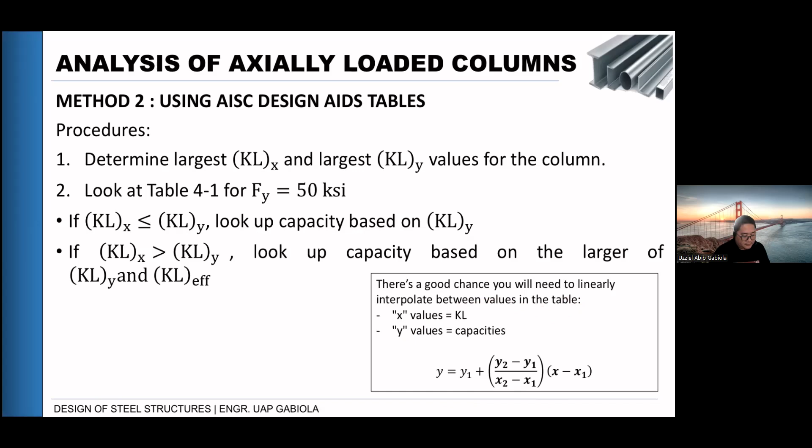So for weak and strong axis, again, ito yung KL effective natin. So that is just a division. Yung KLX value natin, we just divide it by the RX over RY value of our section. So yung RX over RY, we can also look that in our table 4-1. Okay? Or if not, you just need to get the value of Rx and Ry of the given section on table 1-1. Then just divide it to get the KL effective.

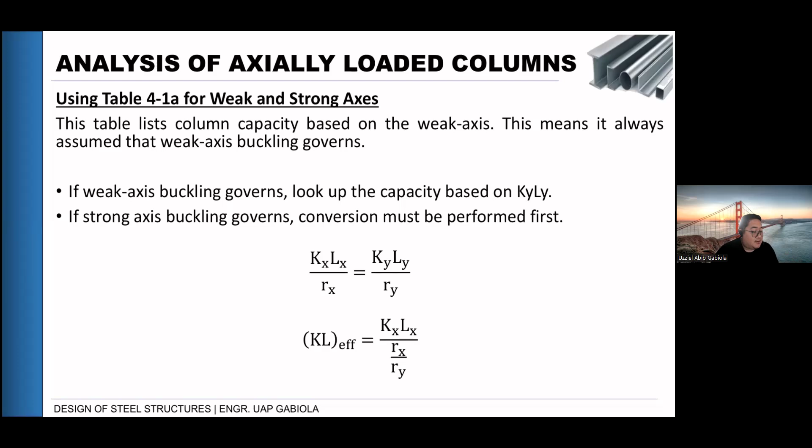So now let's proceed with the design or yung procedures natin for design. So again, for design, ang aim natin is to look for the most appropriate or economical section na gagamitin natin. And ang first step natin, of course, is determine yung load na kailangan natin i-carry. So yung factored load natin, or yung allowable load natin for ASD. After that, determine daw natin yung KL value natin for both direction, for X and Y direction or major and minor axis. So, yung KL natin will depend on the length and the type of boundary condition or support condition ng column natin. Kaya calculate natin yung KLX and KLY.

Okay, select the lightest W-shaped column. So this is a dead load of 100 kips and a live load of 200 kips given the bracing configuration as shown. So let Fy equal 50 ksi. So as you can see, we have the strong axis and weak axis. For the strong axis, we have a support of a fixed condition. So dito fixed. And then for the weak axis, we have two segments. First segment is a pin, and then the second segment is a pin fix. So let's determine yung K value muna nila before we proceed.

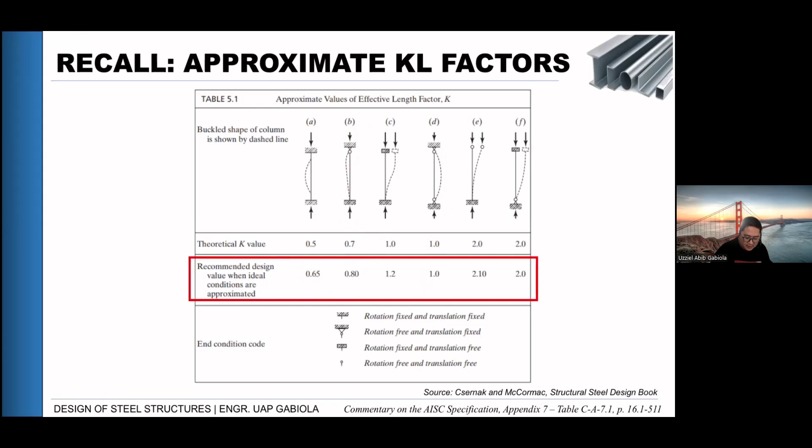This K is equal to 1.0. And then K is equal to 0.8. Okay? And then, let's follow the steps prescribed dito. Number one is to determine yung factored load natin. So, assuming LRFD na lang muna tayo. So, Pu is equal to 1.2 PD plus 1.6 PL. That is 1.2 times 100 kips plus 1.6 times 200. That is 440 kips.

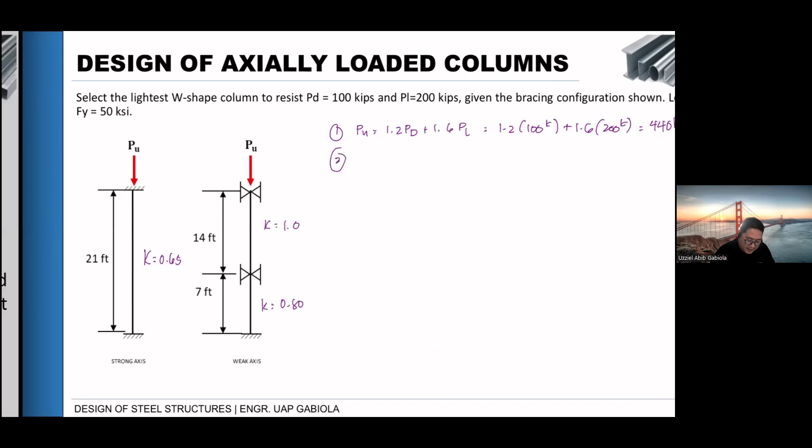Okay, next. Determine the largest KLx sa major axis and the largest sa KLy. So for KLx, isa lang naman yan. That is 0.65 times 21 feet. Now for KLy, ano yung larger natin? Ito yung 1.0, tapos 14 yung length niya. Ito yung 0.8, tapos ito ay 7 feet. So definitely, the larger one is the upper segment.

So this is 1.0 and 14 feet. So this is 13.65 and then this is 14. Okay? So yan, that is the second step.

And then for our third step, based on KLy, select a group of trial sections. So ang KLy natin is 14. Ang pag-select, kailangan ang Pu natin is 440, and yung KLy natin should be 14 feet. So, lagay natin dito, isa sa W14, isa sa W12, isa sa W10, and then isa sa W8. Ito yung kailangan natin i-satisfy: yung 440 tsaka yung 14 na KL natin. So, let's open yung Table 4-1.

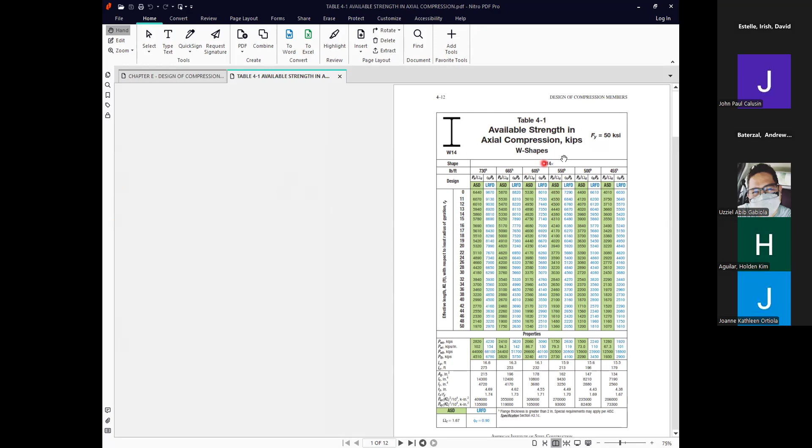Okay? So, what can you see now? Ayan. Yung PDF na ang kita, no? So this is Table 4-1. So starting with W14. Punta tayo dun sa section na may 14 na KL tapos ang capacity na kailangan natin ay at least 440. So si W14, ang starting niya is itong page na to. Titingnan natin yung KL 14, and then yung 440.

Itong kulay blue yung ating LRFD. So sa 14, we have 318, 360, 401. So ang first section is yung 571. Ito yung pinaka maliit na greater than 440. So that is W14 by 61.

Sulat ko lang, W14 by 61. Tapos sulat ko yung capacity niya. That is 571 kips. And then, sulat ko din yung kanyang rx over ry na value dito sa ilalim. Rx over ry niya is 2.44. Okay? That is for W14.

Ngayon for W12. Punta tayo sa smallest ng W12, again sa 14 na KL. So, 384, 502. Ito na yung smallest. So that is W12 by 53, na may capacity na 502. Then rx over ry, that is 2.11.

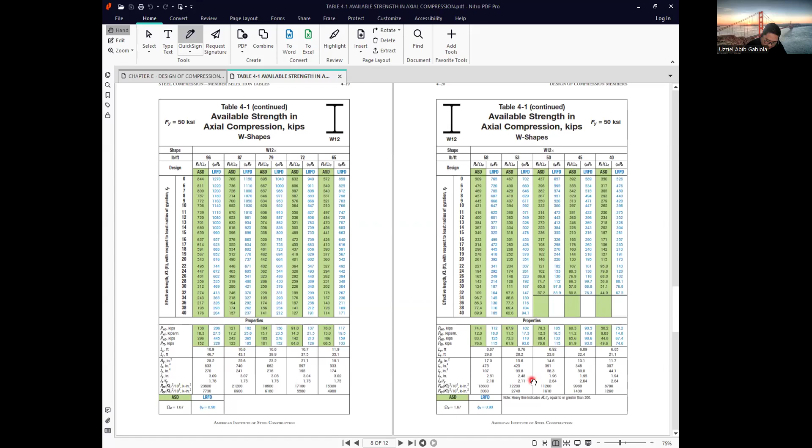Okay. Next is W10. So W10, 14, 471, 359. So 471 yung pinakamalapit. So W10 by 49. Capacity natin is 471. Rx over ry is 1.71. Mamaya ko i-flash yung sinusulat ko, nandito lang muna sa table.

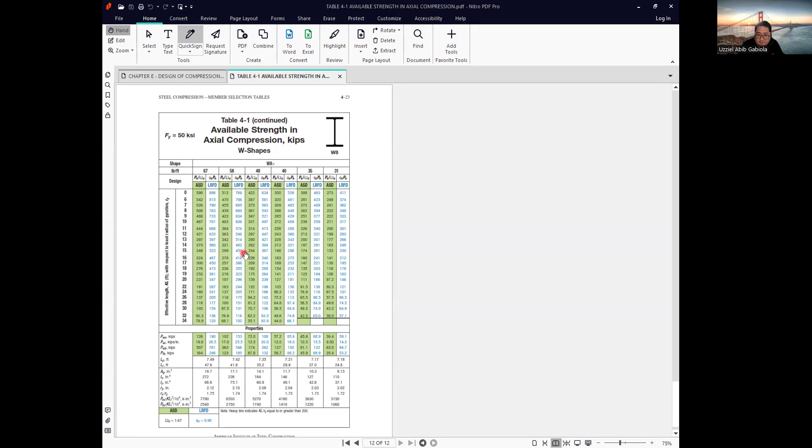And then last is W8. For W8, at 14, 482. So W8 by 58, 482. Rx over ry is 1.74. Okay.

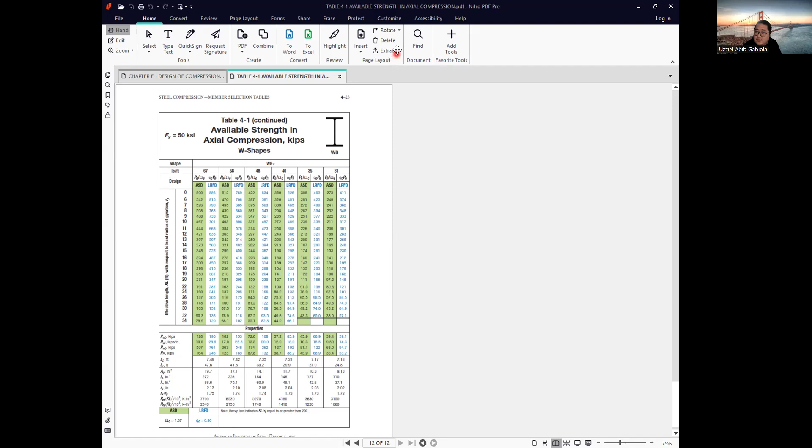So ano na po nakashare ngayon? Nakabalik na ba tayo sa PDF? Can anyone confirm please? Yes po. Okay. So, ito yung lahat ng nakita natin doon sa table. Meron tayong tig-isa. And all of these sections are based sa requirement na na-solve na natin from step 1 and step 2.

So, kung okay na tayo dito sa section na to, the second thing to do is to select saan tayo magsisimulang section. Looking at yung mga napili nating section, saan tayo unang magche-check? Anong size yung una nating i-verify? Anong section? Yung W14, yung 12, yung 10 o yung 8?

Ano ba yung goal natin? Di ba, most economical. So, paano natin masasabing most economical yung section? Most economical is yung smallest ang weight. So, correct, yung W10 by 49. So, let's first use yung W10 by 49.

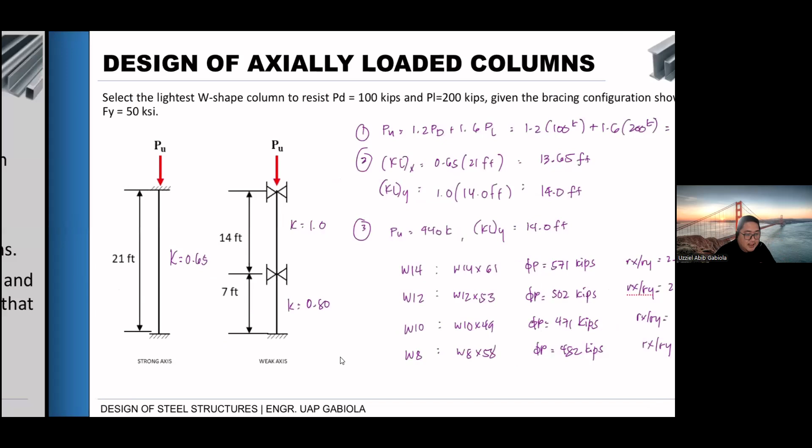Nakalagay dito sa step natin, after we get at least one section from the group, kukunin natin yung consideration natin. So dito, i-compare natin yung KLx and KLy. And based sa KLx and KLy natin, ano mag-govern?

So, yung KLX natin is 13.65 and then yung KLY natin is 14 feet. So, ibig sabihin, yung KLX natin is less than sa KLY natin. Okay? Therefore, pag nag-grade less than daw siya, anong consideration natin dito? Select the lightest one from the group of trial. Okay, diretso na agad. Ibig sabihin, use W10 by 49 agad as our section. Okay? Kasi alam naman natin na pumasa to dun sa requirement natin for 440.

Okay? So, ngayon meron tayong napiling section. The last thing is to verify kung tama yung capacity ng nakuha natin sa table. Okay? I-analyze natin using method 1. So, analyzing based for method 1. Okay? Sa method 1, ang ginagawa natin is yung KL over R, di ba? So, balikan natin si method 1. Yan. Ito yung step ni method 1.

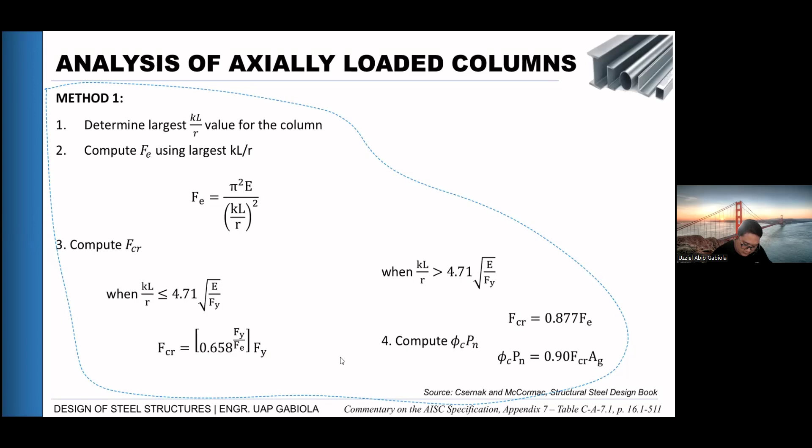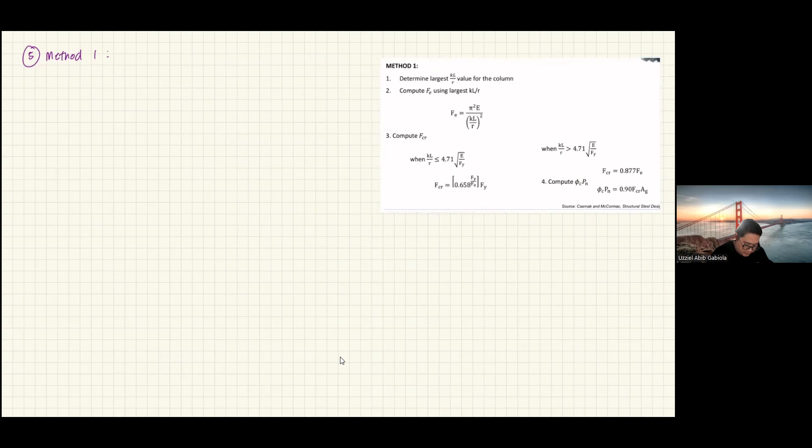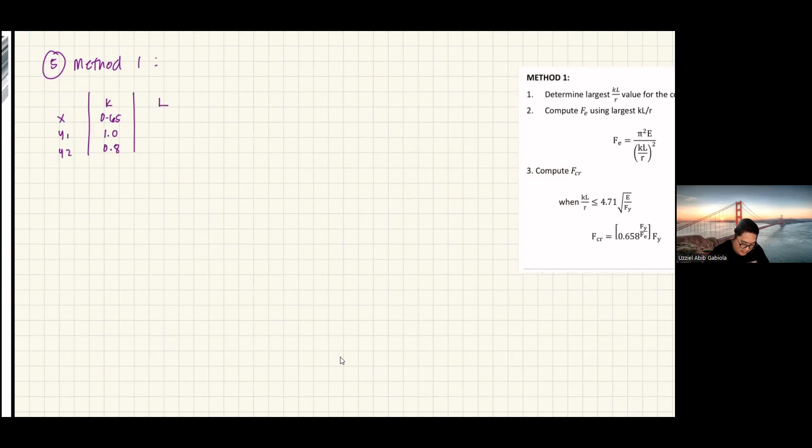Yan. For method 1, calculate natin yung KL over R ng column. So, since we have three values ng KL over R, pwede natin i-tabular na lang. So, meron tayong X, tapos Y1, Y2. Okay? Then yung K natin, as we indicated na, 0.65, 1.0, tsaka 0.8. L natin is 21, 14, at 7. So, dapat gagawin natin inches, kaya multiplied by 12.

And then, yung ating Rx and Ry. So, kunin natin yung Rx at Ry ng W10 by 49. So, pwedeng tingnan nyo na lang sa W table ninyo or doon sa mismong 4-1, meron din Rx, Ry table doon, values. So, dito, hindi ko napakita ha. So, Ry lang pala naka-declare dito. Open lang ako ng table, 1-1.

From table 1-1, W10 by 49, ang Rx natin is 4.35, Ry is 2.54. Okay, so this is 4.35, 2.54, 2.54. So KL over R, 0.65 times 21 times 12 over 4.35. That is 37.655.

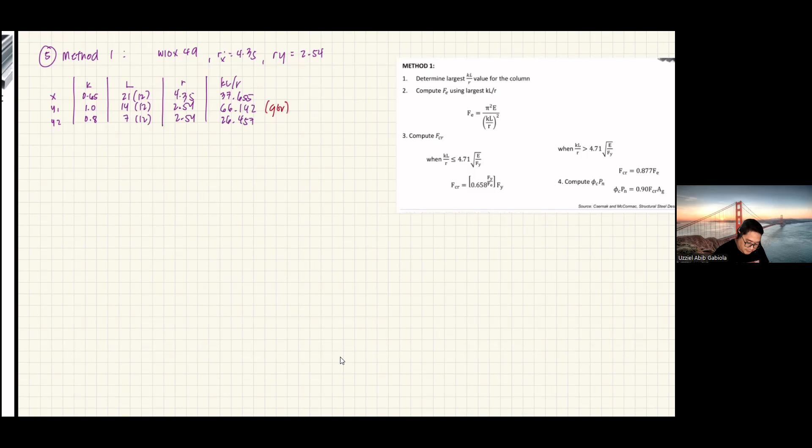1 times 14 times 12 over 2.54. That is 66.142. And 0.8 times 7 times 12 divided by 2.54. That is 26.457. So, ito po yung mag-govern. Okay? So, weak axis govern tayo. So, KL over R is equal sa 66.142. Okay? First step to.

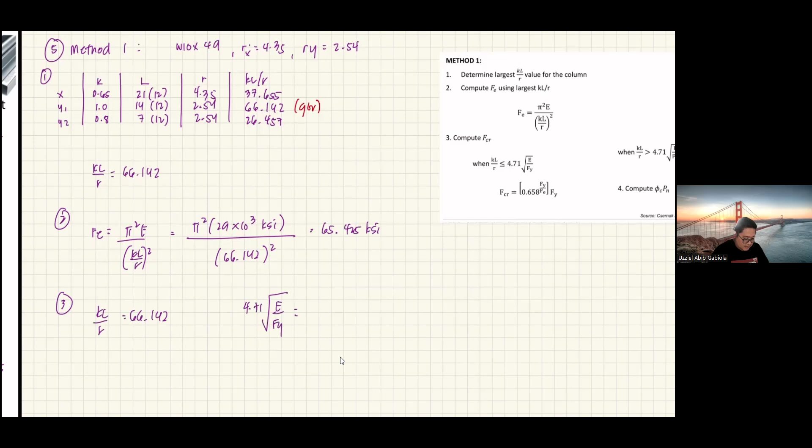So, second step, calculate natin yung Fe is equals to pi squared E over KL over R squared. So, that is pi squared 29,000 KSI over 66.142 squared. That is 65.425 KSI. Okay. And then comparing our KL over R, that is 66.142, with our 4.71 square root of E over Fy. So Fy natin is 50. So this is 113.432. So less than tayo.

So gagawin natin equation is for the inelastic. FCR is equals to 0.658 raised to Fy over Fe multiplied by Fy. So 0.658, raised to 50 divided by 65.425, multiplied by 50. So FCR is 36.312 KSI. Okay.

Then for number 4, phi Pn na tayo. That is 0.9 FCR Ag. So, hindi ko din nakuha yung Ag, pero Ag is 14.4. So, 0.9 times 36.312 KSI times 14.4 inches squared. Phi Pn is 470.604 kips. Okay? Kaya doon sa table, naging 471 yung value niya.

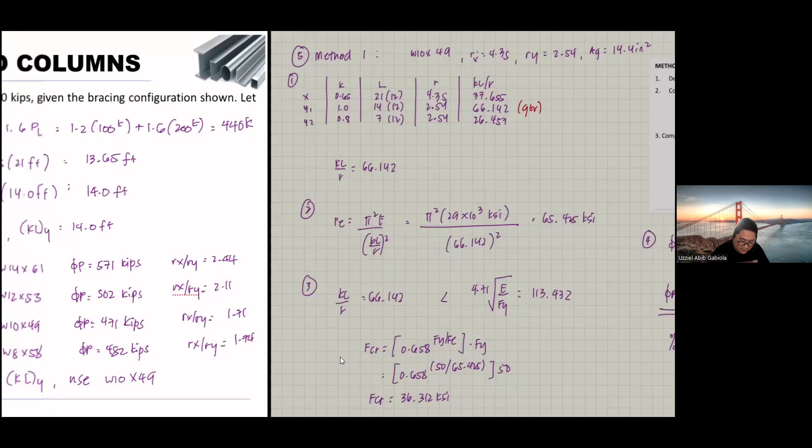Okay? So, na-verify natin na yung value na nakalagay doon sa table is the same sa nakalkula natin once na ginamit natin yung method 1 na analysis equation. Okay? So, to conclude this one, kunin din natin yung efficiency natin. Yung applied loading natin is 440 divided by 470.604 times 100. So, we have an efficiency of 93.497%. Okay, so therefore, use W10 by 49.

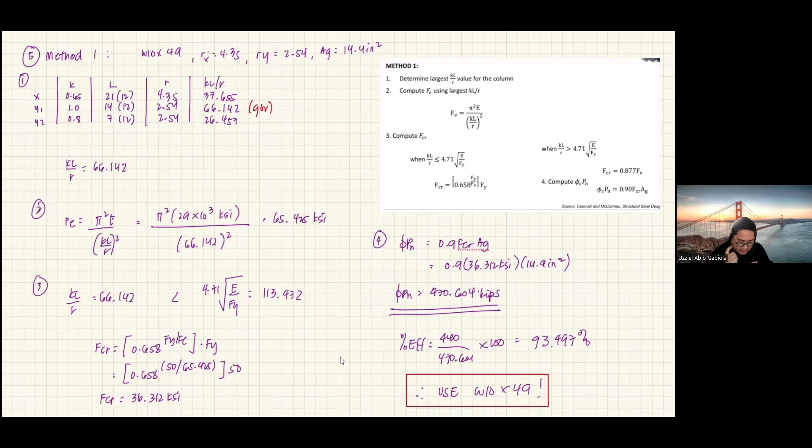Okay, question po for the first example. Are we okay with the example? Any reaction? Sir, kapag po yung mag-govern kunwari ay hindi saktong 14 po? We need to interpolate, no? Halimbawa, yung ating KLX and KLY, halimbawa, govern sa KLX. Let's say 12 lang yung KLY. So, ang gagawin, interpolation tayo.

Or sa pag-select doon sa 4-1, sa simula pa lang, ang pipiliin natin, syempre, ang capacity is yung mas mataas. So, dapat mas maliit na KL value yung gagawin natin. Halimbawa, 13.65 yung govern. Kung magsaselect tayo ng trial section, ang titingnan mo sa table sa 4-1 ay 13 para mas mataas na capacity yung makuha natin. Pero yung next example natin, ganun yung case, kaya papakita din natin. Okay? Other concern? Sige.

So for the second example, we have the given condition, lightest W-shaped column pa din. So this is a Pu, given na yung factored load natin na 650. And ito yung configuration natin ngayon. For the strong axis, we have a pin-pin connection. And for the weak axis, dalawang segment na pin-pin din. So, kung pin-pin sila lahat, ano ang K-value natin?

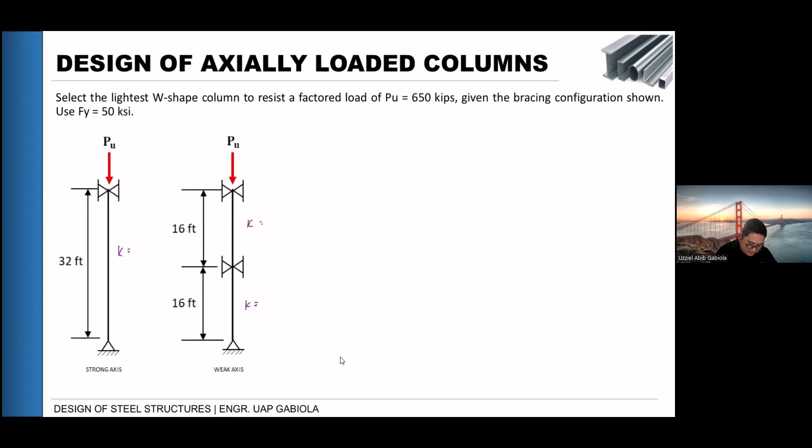Pin-pin is 1.0. Okay? So, for the first step, para sa analysis, so P natin is 650. So, that's okay. Number two is yung KLX and KLY natin. So, that is 1 times 32 feet. Okay? And then, KLY, so the same naman siya. So, that is 1 times 16. Okay? So dito, magbe-base pa din tayo sa KLY muna sa pag-select ng apat na section natin, ano? So using PU na 650 kips and KLY na 16 feet.

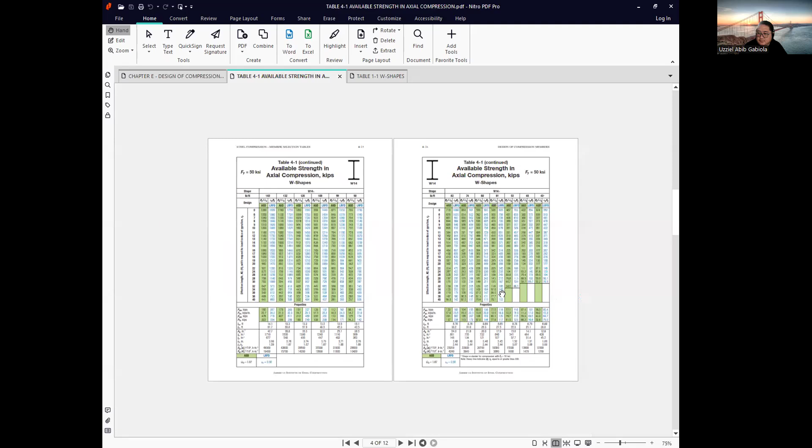Okay, so we have W14, W12, W10, and W8. Okay. So start tayo sa W14. Ayun, 16 naman yung ating ano, no? So sa 16, ito yon. And then, kailangan natin is at least 650. 577, 630, 697. Okay. So ito yan, ano? So 697, so W14 by 82. And then, yung capacity natin, ΦPn, saka Rx over Ry. That is 697 kips. And then 2.44.

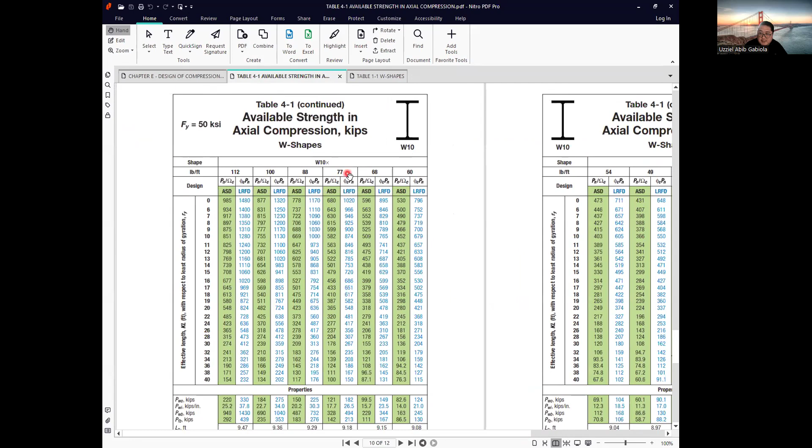Okay. Then for W12, 16. So dito 499, so hindi kaya. 16, 640 kulang. And then 709 ang kasunod. So W12 by 72. And that is 709. Rx over Ry 1.75. Then for W10, so sa 16, 471 to. So hindi na kaya ang lighter section. So 530, 599, 686. So dito tayo. W10 by 77. May capacity na 686. And then, Rx over Ry na 1.73.

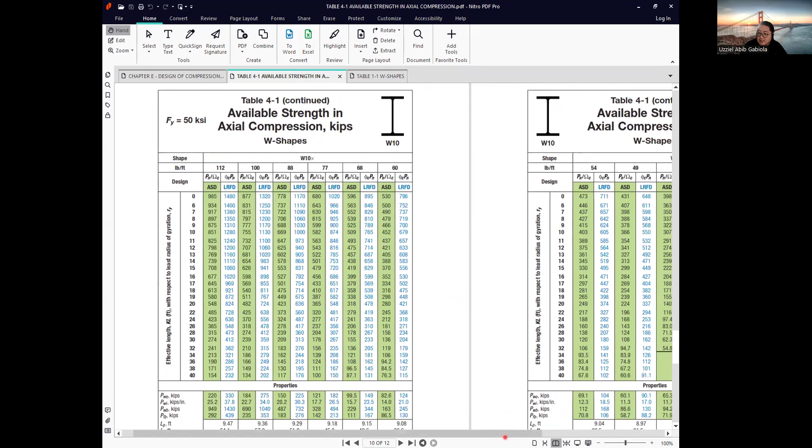Then last, W8. So sa W8, 16. So 487 tong dulo. Tapos, wala na siyang kasunod na W8. So kung wala nang ibang W8 na available, it means na wala pong pwedeng W8. Huwag nyo na ipilit, ano? So, tatlo lang yung trial section natin. Okay? Ayan. So, ito yung mga na-select natin section, ano? So, wala tayong W8.

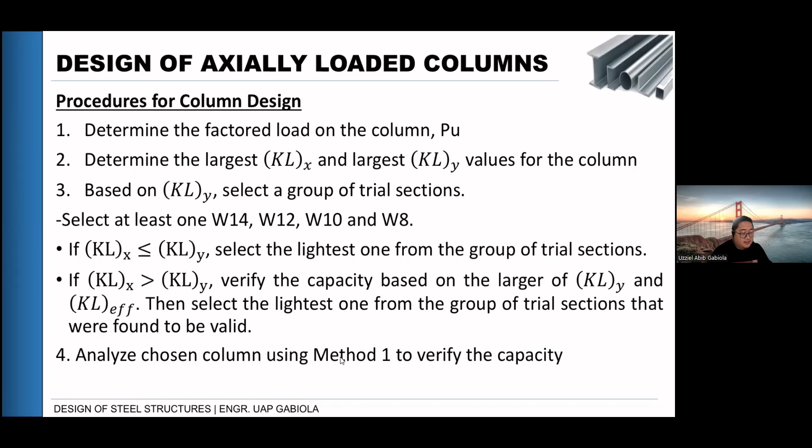And then, comparing our values, yung KLX natin ngayon is greater than dun sa KLY natin. Okay? And anong sabi dun sa step pag ganun yung naging case? Verify yung capacity based on the larger of KLY and KL effective. Then select the lightest one from the group of trial sections that were found to be valid. Okay? So, kailangan lang natin i-check isa-isa para makita natin kung paano yung elimination. Or, pwede naman magsimula doon sa lightest section and then moving forward. Sige. Lightest muna tayo. The first one will be yung W12 by 72 kasi siya yung lightest.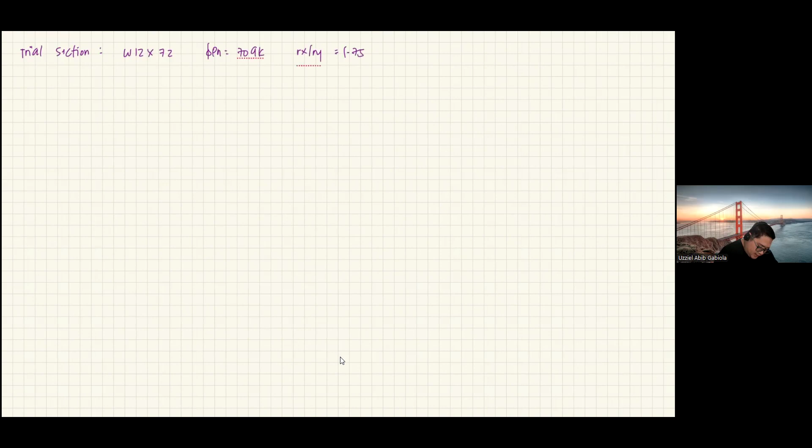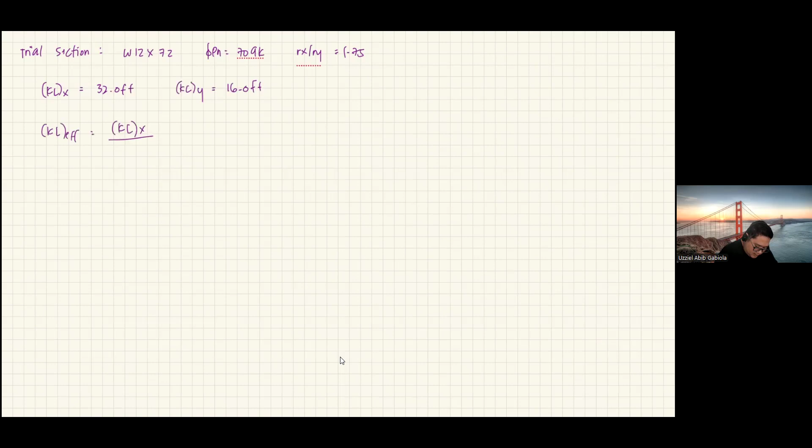So, sige. Trial section natin is W12 by 72, 709, 1.75. Okay? So, for KLX, we have 32 feet. KLY, we have 16. Okay, so to calculate KL effective, that is KLX over Rx over Ry. Kaya kinukuha ko yung Rx over Ry. And then substitute. So that is 32 feet over Rx over Ry, that is 1.75.

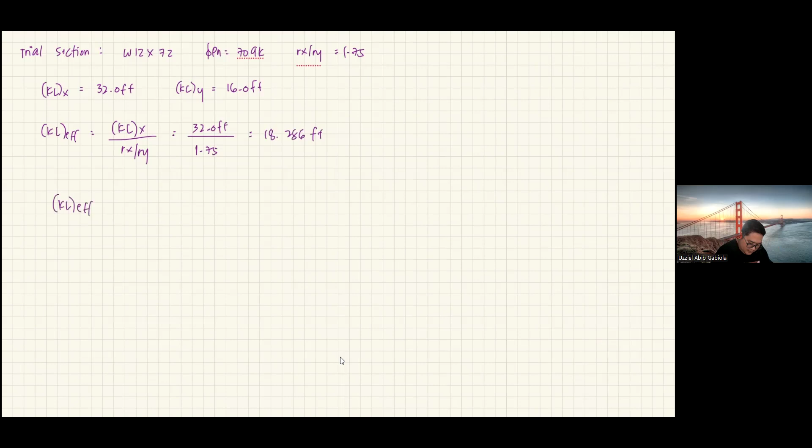So that is 18.286 feet. Okay. So comparing KL effective with KLY, mas greater siya. Therefore, we need to get the actual capacity based sa KL effective na value, which is 18.286. So, sa table natin, wala pong eksaktong 18.286. So, mag-interpolate tayo. Kukunin natin yung KL saka yung corresponding value na ΦPn. Kailangan natin is 17 tsaka 19. Tapos, andito sa gitna yung 18.286.

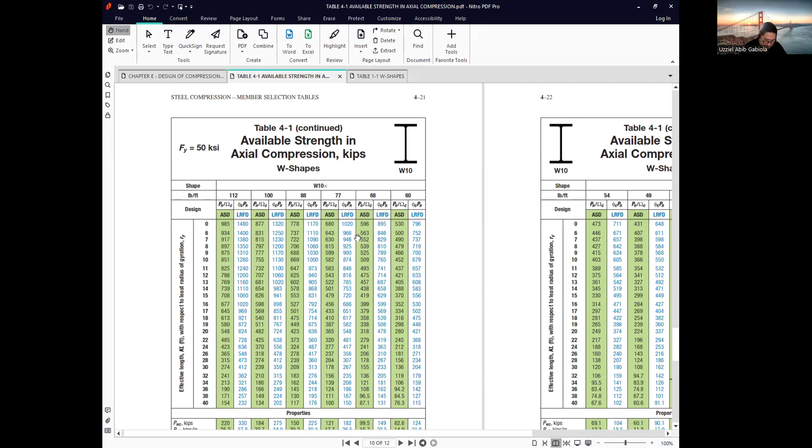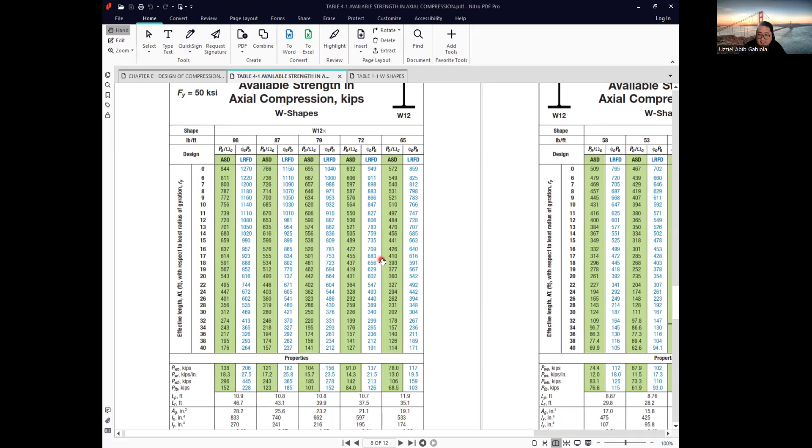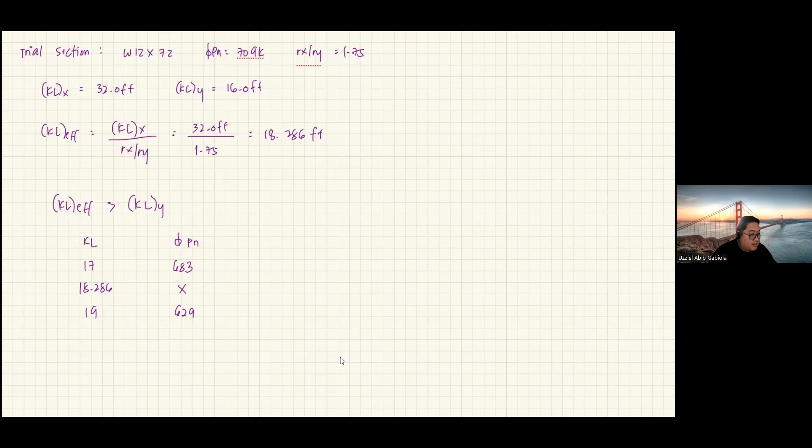So, looking at the table, W12 by 72 pala tayo. Okay? So, yung value ng 17, by 72, that is 683. Tapos si 19 ay 629. Okay? So, kailangan kunin natin yung value nung x natin between that. And then, yung P na kailangan natin i-satisfy is 650. So, interpolate tayo.

So, that is 17 minus 18.286 over 17 minus 19 equals 683 minus x over 683 minus 629. So, x is, you can use your shift solve if still allowable, or you can use your calculator. Kaya namang i-simplify sa calc yan. 683 minus answer. So, answer is 648.278 kips. Ito yung actual capacity niya, which is less than dun sa PU natin. Therefore, siya ay inadequate. Hindi siya pwede, ibig sabihin.

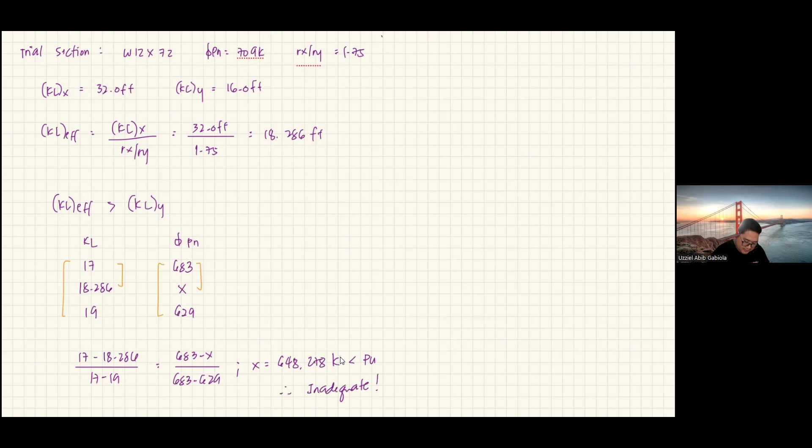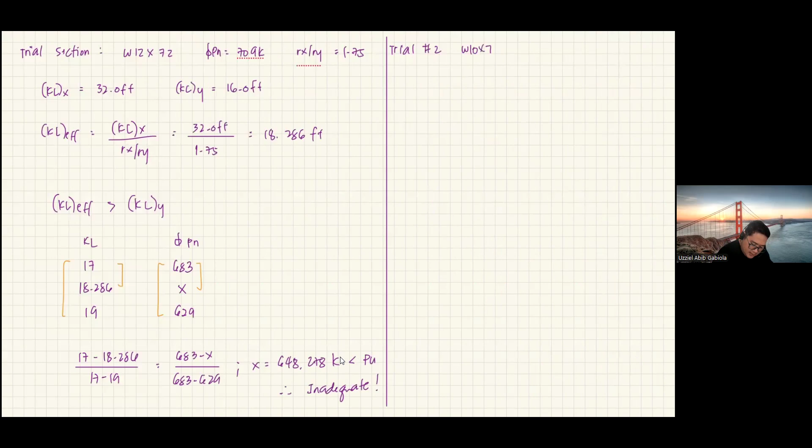Okay? So, next section tayo. Trial 2. Yung next section natin will be W10 by 77. Ang ΦPn niya is 686. Rx over Ry ay 1.73. Okay? So same KLX, KLY naman tayo. So kailangan kunin natin yung KL effective. That is KL, 32 feet, divide 1.73. That is 18.497 feet. Mas greater siya sa KLY.

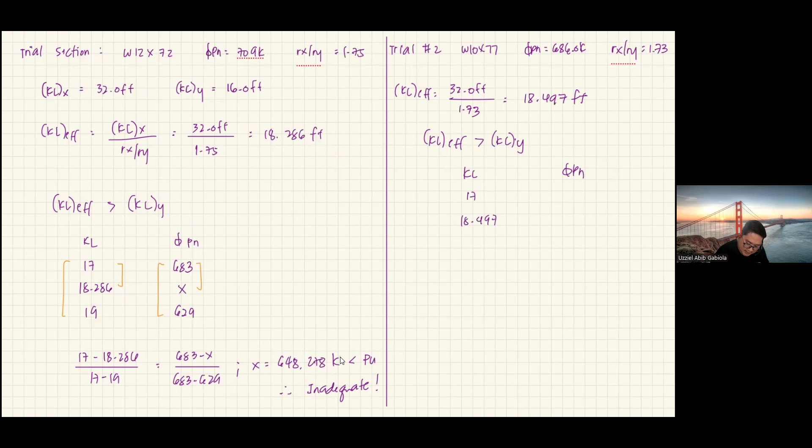So kailangan kunin natin yung value ng 17, ng 18.497, saka ng 19. So, pupunta tayo ngayon sa W10 naman. So, for W10 by 77, yung 17 niya is 651. And then yung 19 niya is 582.

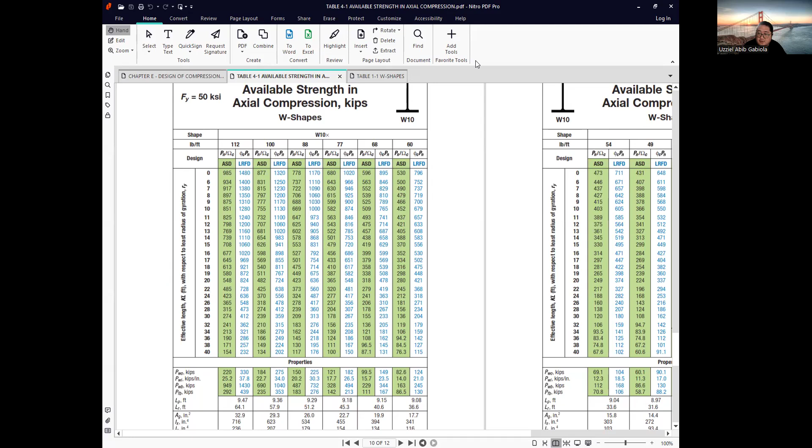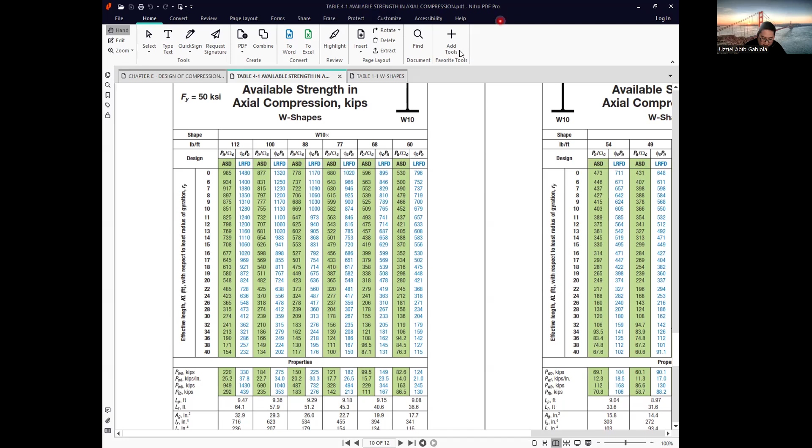This is the value we got. So if we interpolate, what do you think would be the value of x? Do you still need to interpolate?

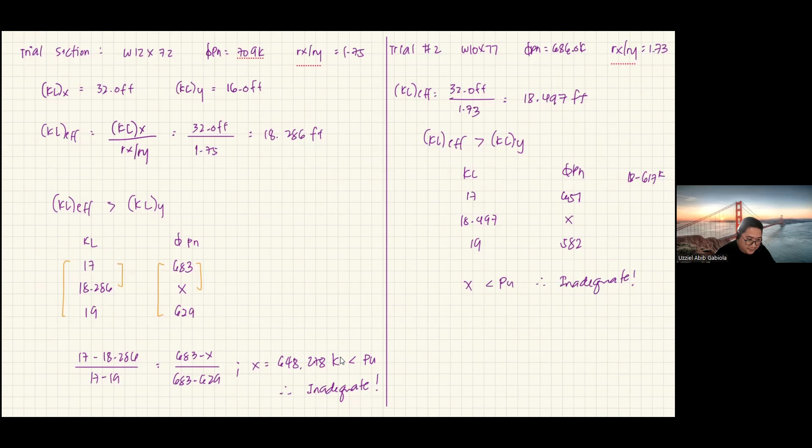Now let's move to the next trial. Trial number 3, which is... so that is W14 by 82.

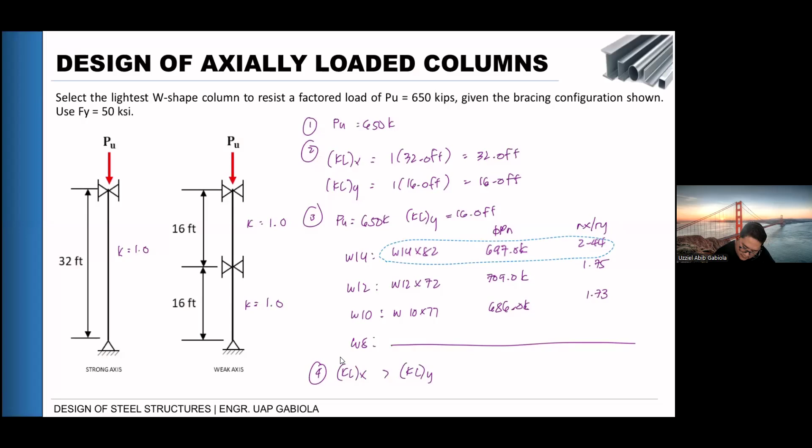So our KL effective will be equal to 32 feet divided by 2.44, which gives 13.115.

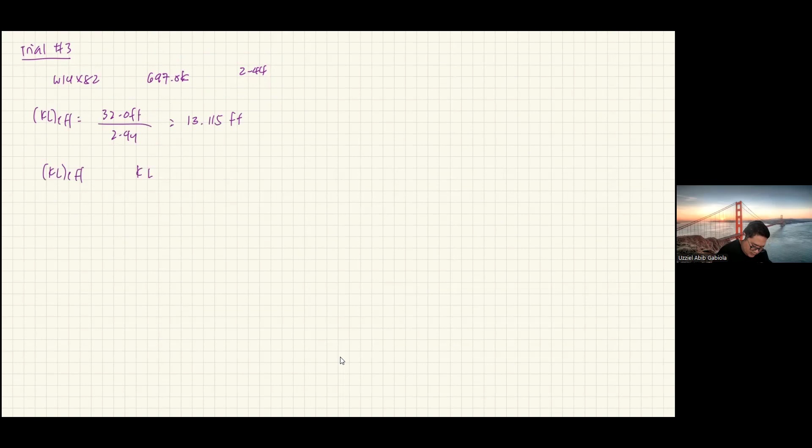Comparing KL effective with KLY - what was our KLY earlier? KLY is 16 feet. So now it turns out KL effective is less. It means KLY is the governing value.

So if KLY governs, it means our PN is 697.0, which is greater than our PU. Therefore, it is adequate.

So let's get the efficiency: that is 650 divided by 697 times 100, giving 93.257%.

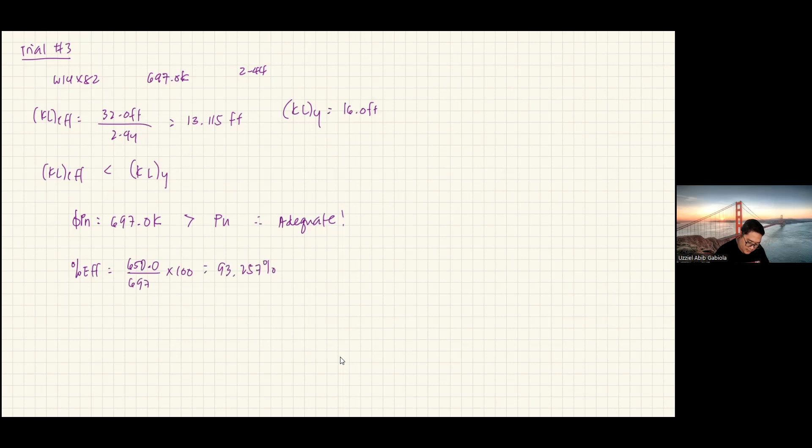So therefore, use W14 by 82.

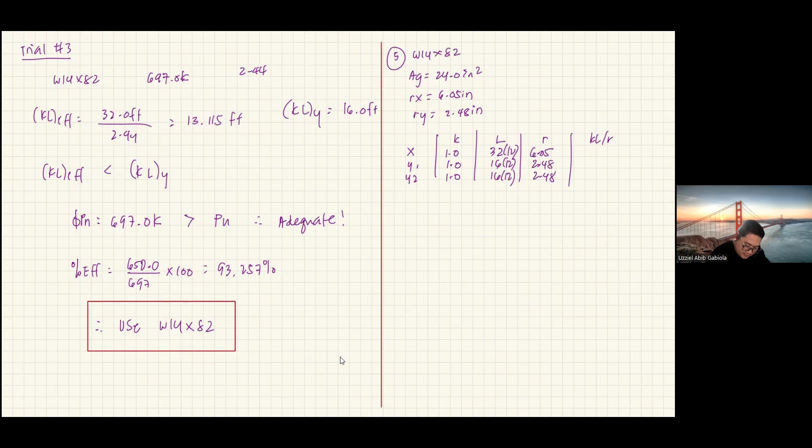So for KL over R: 32 times 12, divided by 6.05, that is 63.471. Then 16 times 12, divided by 2.48, that is 77.419. Okay, so it's the same as before.

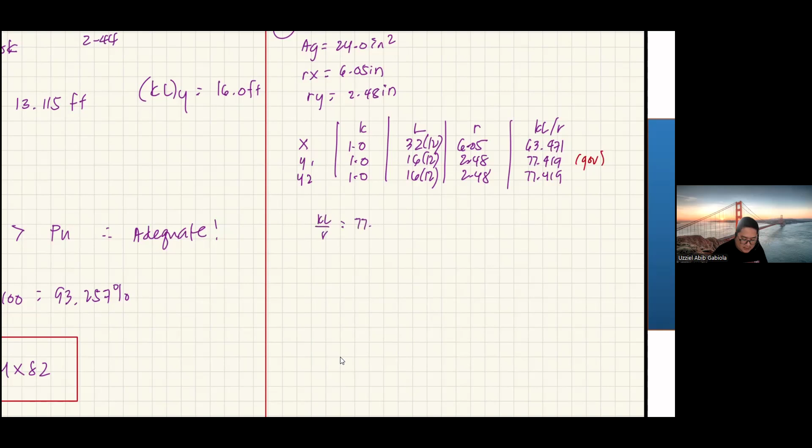So the governing value is the larger one. So our KL over R is 77.419 - the minor axis governs.

And then we have FE: pi squared E over KL over R squared. Pi squared times 29,000 KSI divided by 77.419 squared.

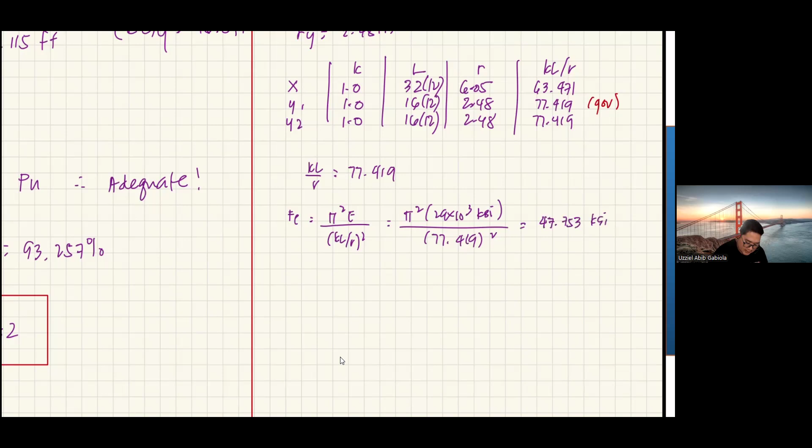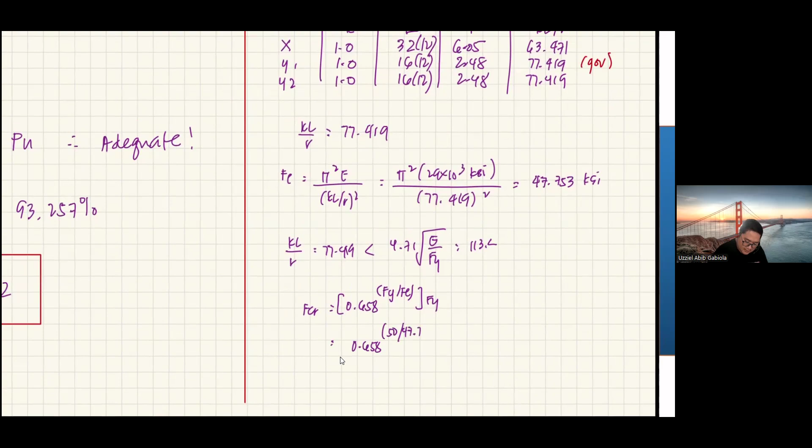So our FCR is 0.658 to the power of Fy over Fe, times Fy. That is 0.658 to the power of 50 divided by 47.753, multiplied by 50. FCR times 50 gives 32.258 KSI.

So phi PN is 0.9 FCR times Ag. That's 0.9 times 32.258 KSI multiplied by 24, giving 696.773.

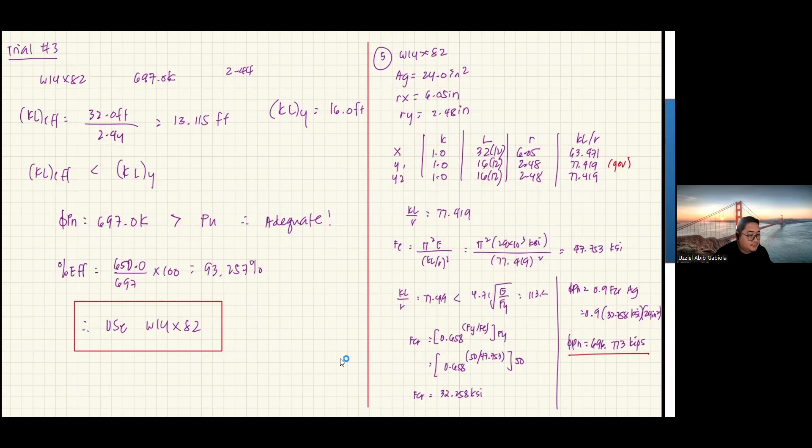Okay, any more questions or clarification?